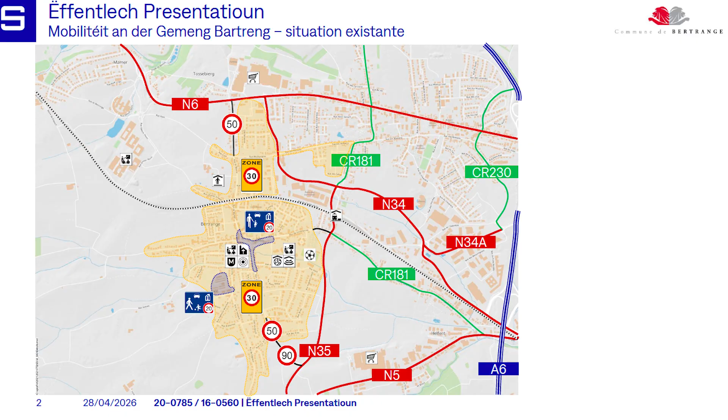But we will go forward. We had a rainwater canalization that we did not have included, and which is also not part of traffic problems. But if we have a center like this, we want to think about how we can improve the quality for the pedestrians and the cyclists, to have cleaner and more secure streets. This is why we started to go more into the peripherals of this municipality.

So last year we imposed the 30 zone in Bartringstrasse. People have to be ready, infrastructure has to be ready, and the infrastructure has to be adapted a bit for this. And this is where we had a little discussion with the people from Mamer, and the people were told about the results from the workshops. And this is a bit of the entire history.

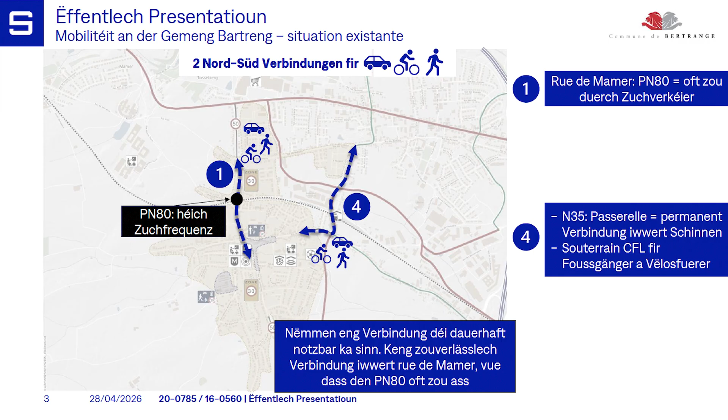So now we have two places where we can cross the railway, at the PN80 and N35. This is where we have the gates, and these are very often closed. We know that. And we have problems with security because people don't wait and don't follow the rules. And because all of this takes a long time, this is not good.

Then the next one is a bit higher up. This is the bridge that goes above the train station, where the bicycle and pedestrian walkway is bigger. And then we have also the small walkway at the train station.

At the extremities we have two connections. What is missing is in the middle, and this is where, when I want to go from the north to the south, from the residential zone to the schools, it's also way more interesting than the Rue de Mamer, where there's no crosswalk.

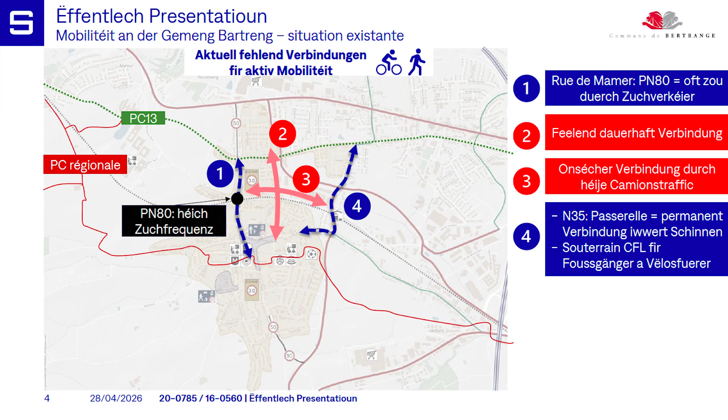And the left-right connection, that is the Rue Chemin de Fer. This is where the trucks and vans drive through, and this is still an important connection. This is the way we use to get out of the center towards the city, so the west-east connection will also be important.

And then we have the entire thing that will be a bit more flowing. We have in the middle, number 2. And then also from left to right, number 3, from Rue de Mamer.

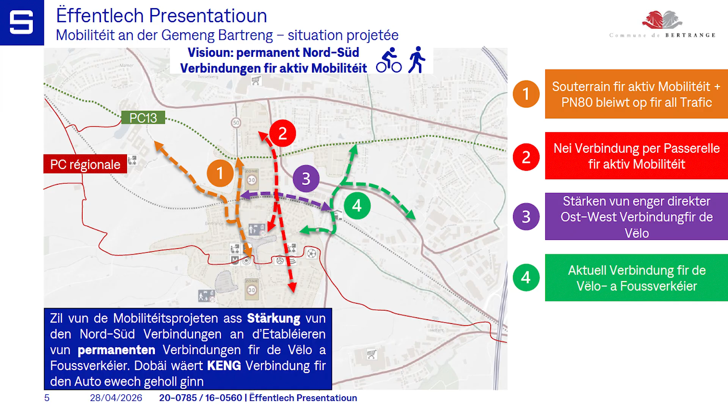And we want to create a secure crossing without gates or unsafe crosswalks. If you look a bit closer in the zoom, we can see in detail the distance between the different connections.

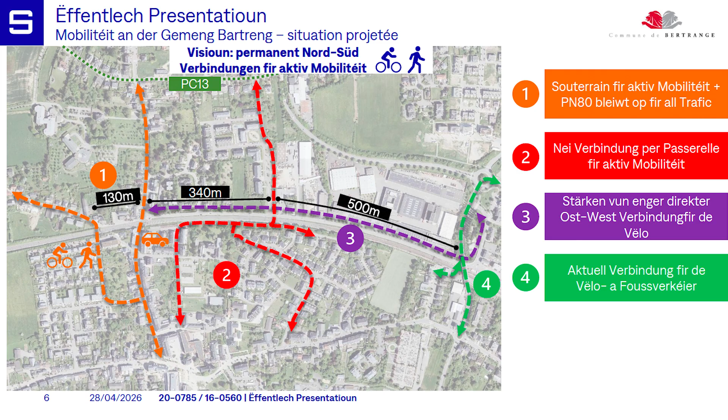Tomorrow that would be the gate crossing, and there will be an underground crossing. The idea is, if the gate is closed, that I have an alternative way to cross, right in front of them. This is why they're so close next to each other.

We should be 340 meters away from the train station. And if I live in between those crossings, it will be quite complicated, and this is why we take the car. This is why we build this connection in between, to avoid taking the cars.

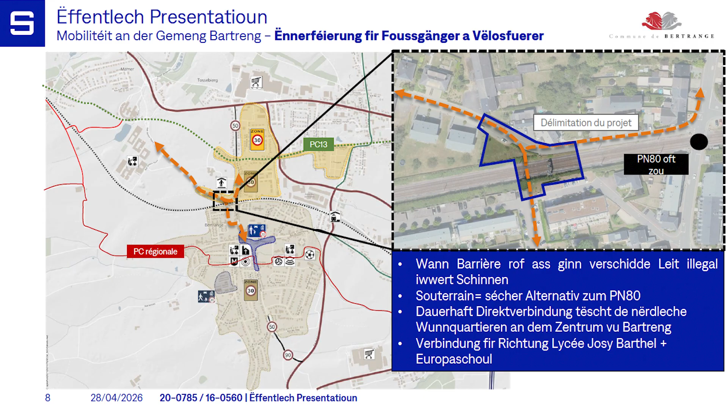The blue is the field, the area of the project. The goal is to offer a safer alternative to the PN80, where kids can go safely to school, and if the PN80 is closed, we can just walk through there and bring our bikes with us as well.

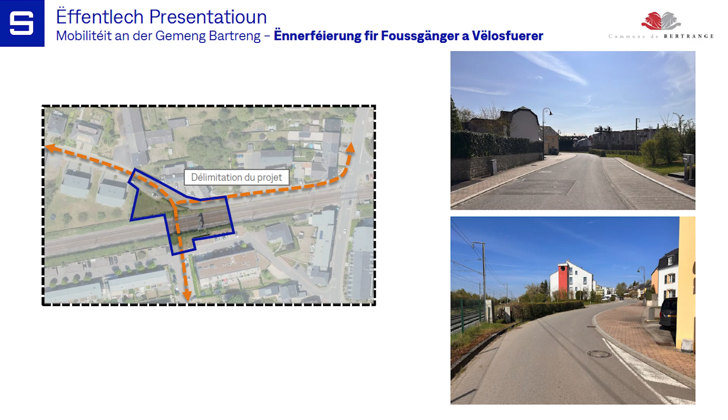I went a bit too fast. Touch the button too often.

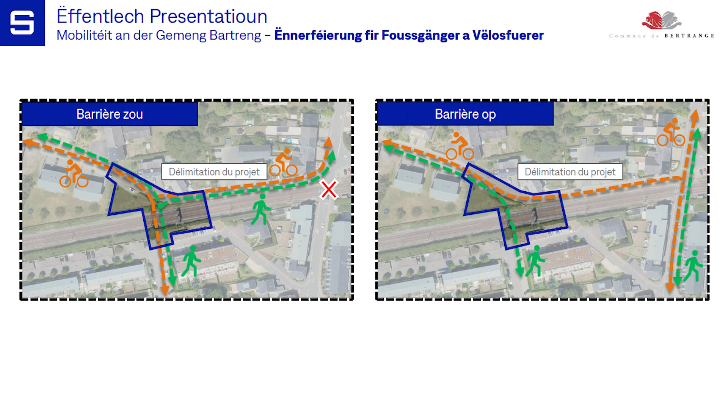So the barrier in the direction on the right, if it's open, then of course one wants to stay at the Rue de Mamer and just take the normal passage. If we go from the European school, from the high school, I can just go to the underpass as well. The bike will probably take the PN80 when he sees that it's open, because we take an underpass primarily for the pedestrian, but the bike, and along the stairs, can be taken with him too.

If the barrier is closed, I can then go to Mamer Street. I can decide, do I want to wait there, depending on which direction the train is coming in. I don't know it actually, except if you know the schedule. Then I can go to Rue Charles Schwall by the underpass and then to Cité am Wenkel, or immediately in the direction of Mamer Stroß, to the center. That is actually the alternative I have.

So to detail, we go into the plan. I have some issues here with my remote. You don't recognize a lot. That's not the idea, I think the plans are hanging outside.

Have a look. But basically, with an ouvrage, meaning a frame that is built, we go under the train tracks, and to the north and to the south we build stairs and a lift. That's the whole story around it.

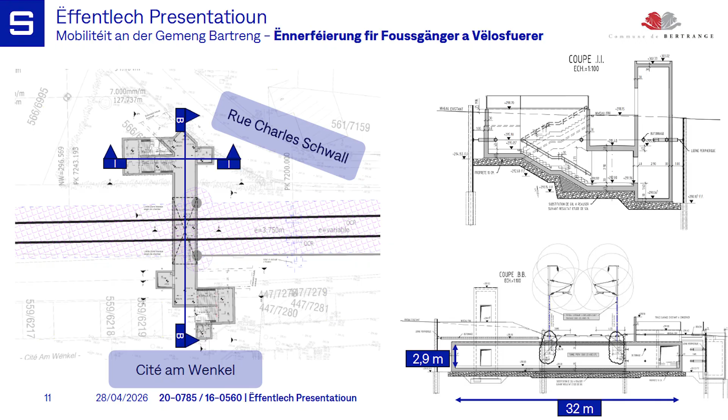And it's compatible that along the years, ramps could be added for bikes. We build it such that we would have a plan B to upgrade it. But today, we need some authorization from the CFL, where the signals are, that would hinder something.

The things we would have to do would be costly, and as we said, the PN8 is already close to it. The bike can already get down with the stairs, and the lift already offers that possibility. We shouldn't make the project more complicated than it already is, so we decided to limit it to stairs and a lift.

The structure itself, underneath the train tracks, has 32 meters of length, and inside it's 2.90 meters in height. As a pedestrian you still have some space, and the width is 3.50 meters. It's nothing very small, because we want people to feel comfortable. It's also well lit, so people shouldn't be scared to go through. Of course it's always an underpass, but it's so close to houses that with so many people going through, you feel surveyed and not alone, since it's not out in the fields.

How does the construction site work? In Rue Charles Schwall, the red area is still a work site, and the blue is a hole. This is what we have to build in order to realize our staircase.

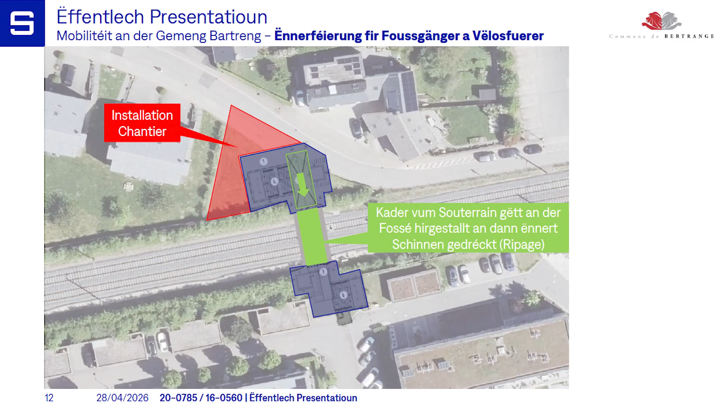To the north, the green is the frame built in a hole. First the hole is excavated, then inside the frame is built, and then over one weekend, while the tracks are removed, we push it through. I'll show you a picture so you can recognize it. That's why we need this space to build the frame.

The underpass is the passage you go through afterwards. We are in the middle of the city, meaning first we have to do some reinstallations. We have a sidewalk close to it; in the final project the street will be changed.

The street will regain some space in the final design, but during construction we'll have less room to drive through. As you can see here with one lane, it becomes a dead end. Back there are maybe a dozen houses left. In our opinion it's manageable: if you see someone coming around the corner or from the front, and if nobody's coming you can just pass. We may install a priority sign, but with the few cars using this dead end, it should work out.

We need the space, as I said, to carry out the construction. Afterwards, the hole is filled up and it's as before.

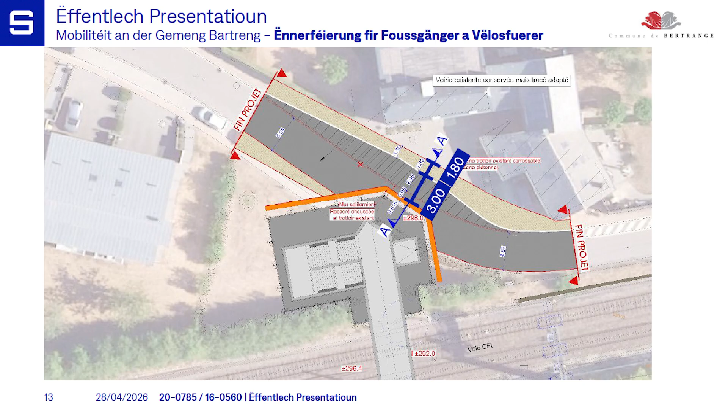This is what it resembles in its final state. As you can see, the staircase goes around the corner at 90 degrees. It's not very far, but I especially want to show this detail.

If you go down with a bike, you may already know this from other projects: you can just take it along with you. If it's an electric bike, it's a bit more to push. Or, as I said, you just take the lift or the stroller ramp. If it's a cargo bike, you won't be able to take the lift, because there's no lift large enough for a cargo bike.

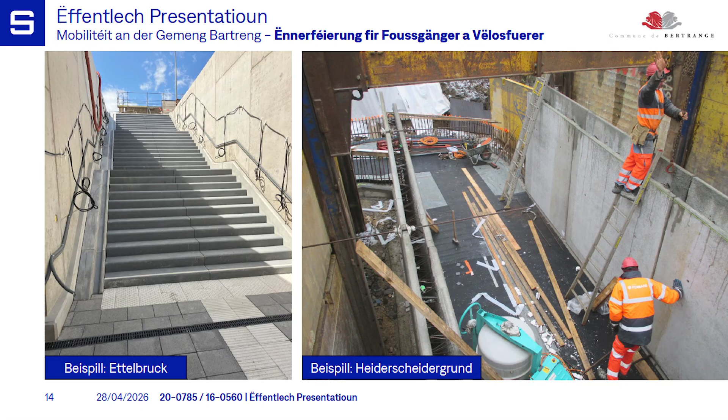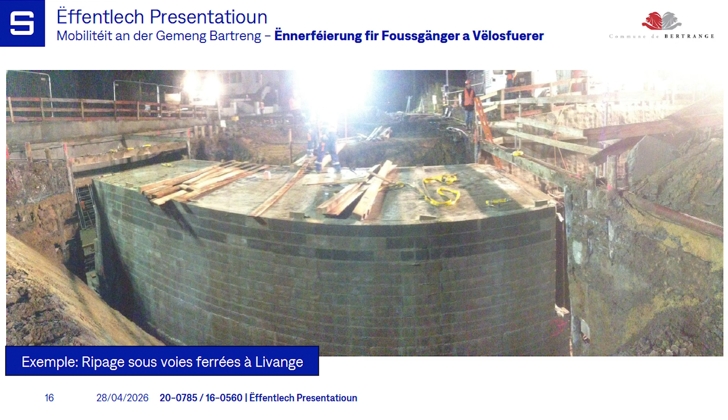This is an example of a frame built along the tracks. You have to imagine the tracks were there before the weekend—in this case before it was built here in Livange.

Then comes that famous prolonged weekend between Friday and Monday—I think it's Allerheiligen. We'll see the planning afterward: the tracks are removed from Friday to Saturday, and then Saturday evening this frame is pushed inside.

Let's get back—the frame is already pushed back in, then we fill it up with dirt and the tracks, and from Tuesday on the train can drive again. Monday is actually a holiday, so we can't do magic, but it's already great that we can build it in such a short time frame.

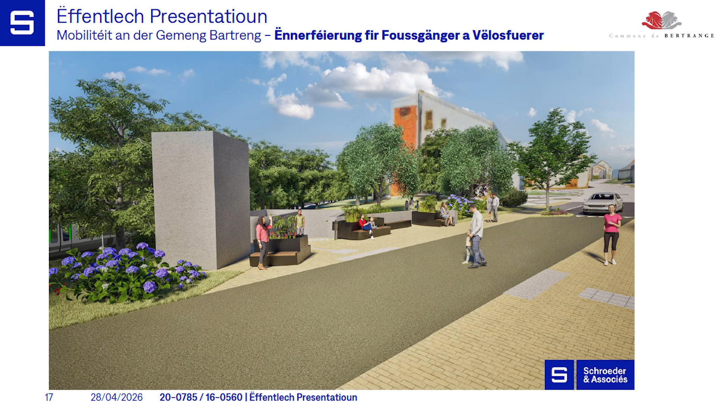Here we see images of what the final situation resembles, so you can imagine it better. This is from Rue Charles Schwall looking up toward Rue de Mamer, and then the stairs go down. This is the lift from behind, and this is the street itself.

And then let's speak about the planning. When do we go to construction on your streets? For those who live there, it should start February 27, and we've planned to finish in June 28. It doesn't take years, but it's still something.

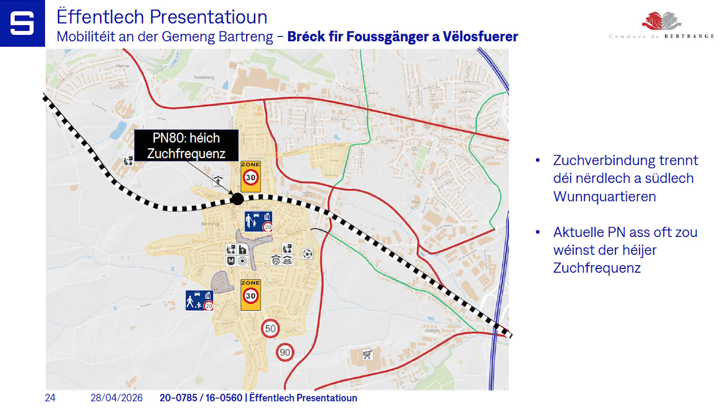So as said, afterwards we have a discussion about all the projects. The second project, the mobility project, is this footbridge in the middle, Allée Mayrisch down Rue du Chemin de Fer to Cité Eechels. Here once again the history: the train divides - what do we do?

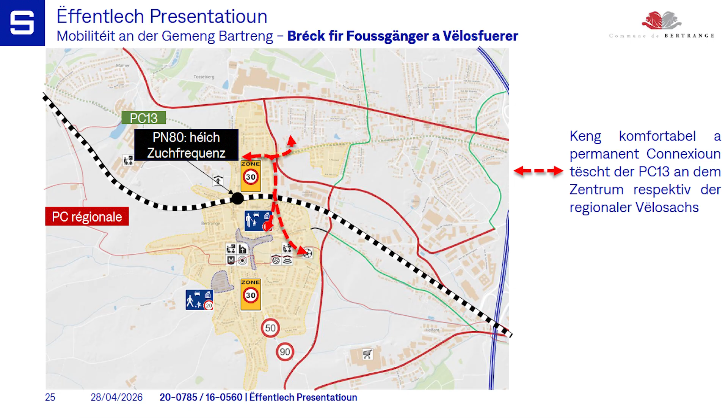The red connection is above the tracks. Why? Just by topography it fits, because the city at the north is a bit more elevated. If you go down to Rue Chemin de Fer, then you continuously drive downwards. So at a certain point we start going up from the tracks, and on the other side we get down behind the hill, not on the hill but the side towards the train tracks. That's why just by topography it fits.

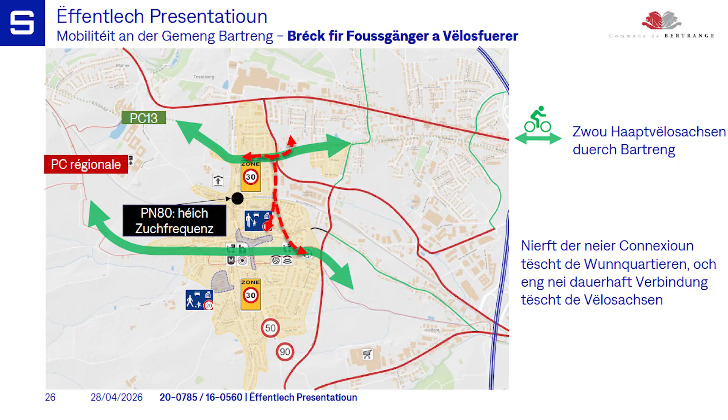And then we have additionally the chance that through this we can create two bike connections. Once the original connection that comes south of the tracks, and then PC 13 Rue des Romains, where this also works. And through this I can already say it - through the ministry, we elaborated with the ministry.

Once you get connected to a national connection, you get subsidies accorded, and we're in the final phases. We still wait for the final post, and we assume that after some conversation, the municipality will be paid by the state, because we do it in the interest of the bike and better infrastructure in general.

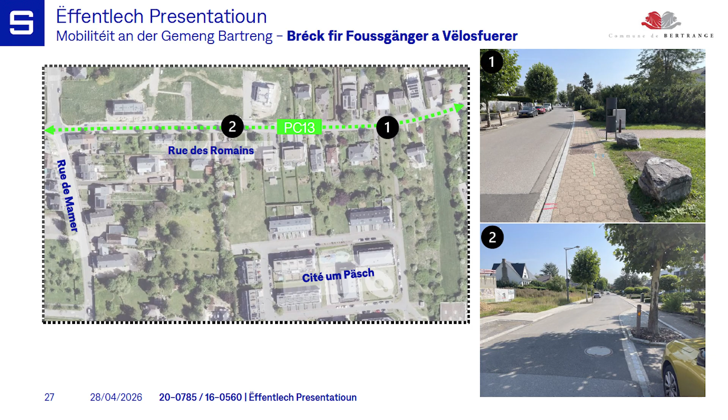Beyond the municipality, this project belongs more - I've only spoken about PC 13, Rue des Romains. We want to profit from the fact that in Rue des Romains it's already narrow, but there's a lot of traffic going through, so the bike will get accorded more rights. We will reduce the tempo - it's already 30, we won't reduce the tempo further, but want to establish some additional measures. We did some measures, for instance, that cars drive a bit slower. Some people are annoyed, but others that were annoyed by too fast driving cars will have a relief.

There you see the connection - I got to search it for myself. It's this down into Cité um Päsch, and this is a way. If you don't know that it exists, you already cross it without noticing. You already got to be from here to know that this exists.

This point will be reevaluated, will be connected. If I drive here with the bike, I'm immediately in the street. It's a narrow sidewalk, and we want to improve it.

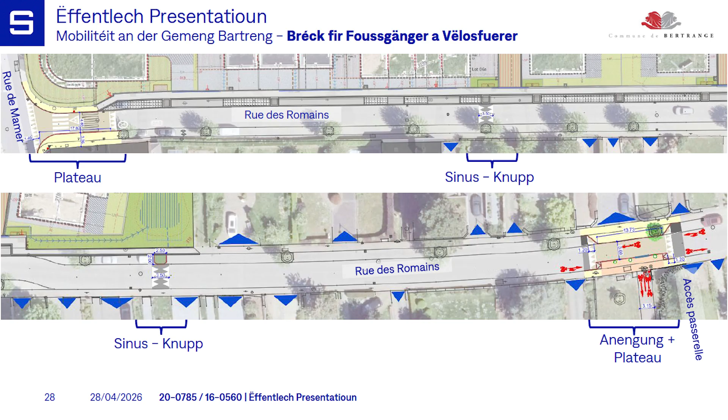Here's Rue des Romains. From Rue de Mamer, it's divided in two, so as to be big enough to the right. And then here, I'm in the connection down to the city, where we make the street narrower to one lane, but the bike will get the possibility to drive across the sidewalk, making the way more secure. We won't end up anymore at the narrow sidewalk, but on a wide surface, and then I can take the turn.

This is a foot bridge that we want to show you soon. We want to connect the different streets cleanly to the network.

You can maybe notice some speed bumps, those we already installed on Rue de Mamer, where you drive above and it shakes the car, so automatically you drive slower. Then on Mamer Street itself, there's a plateau near the crosswalk, over the project for the whole intersection.

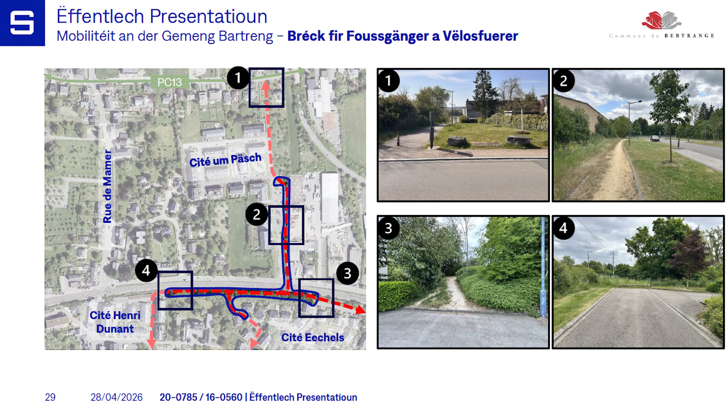So there you go, then PC 13, we spoke about it. We go down Cité um Päsch, Rue Aline Mayrisch, Saint-Hubert, and then to the footbridge at point 2. Then we go over to the southern area across Rue de Chemin de Fer, then a 90 degree turn left on Cité Henri Dunant, and here Cité Eechels we can connect at 2 points.

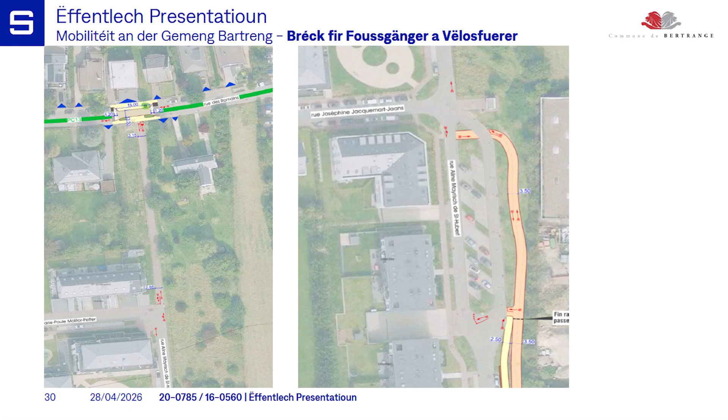What do we do in the upper part before we speak about the passerelle? This is the narrowing here for PC 13 on Rue des Romains. As I said, to better connect to this path, trees that were recently replaced were put back further away. We'll explain why.

It's not because of the car, but because of construction. Then we drive down to Saint-Hubert. We don't have space on the side, paved up, it's private parcels. From the junction standing there before the street splits, we drive across to what is now still a sidewalk, and then from this part on, we drive to the footbridge, and the sidewalk just continues from the footbridge. We can connect to PC 13 cleanly, so that the network to the north is better.

Then we continue to the passerelle. Michel may come now, Michel Bichler, the engineer for us for the footbridge. The person from the underground was excused for today. Thank you for the word.

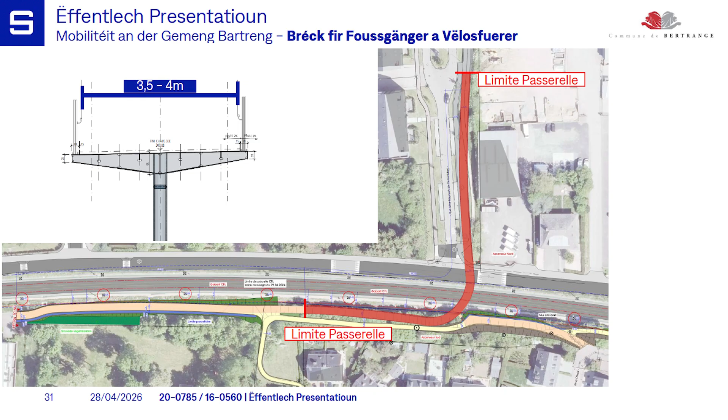I'm here for the footbridge. I'm the engineer for Schröder Associé. I have the chance to be part of this project since the beginning.

So here we have a bird's eye view of this bridge. It's a bicycle bridge with a pedestrian path, so we will have to make enough space so that both may pass each other. We also want to include people with reduced mobility, so they may also have a secure crossover. Both are very close to the road, and we also wanted to put it very close to the railway so you don't have to go far away. We also had to make a lot of space for the bicycles.

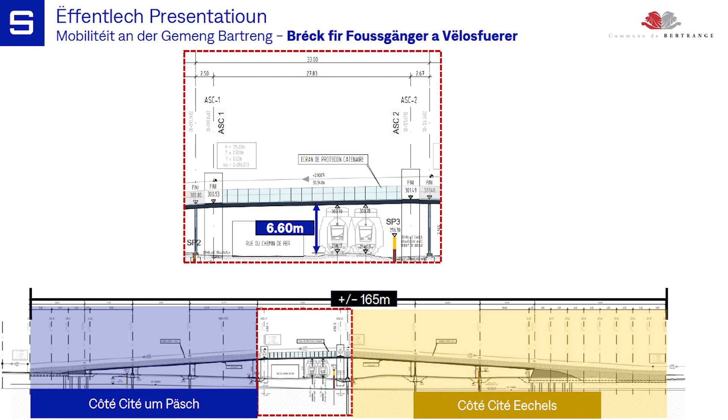This is another image where I can explain it a bit better, on the horizontal view, where you can see the height of 6.60 meters, and also between the two elevators we'll have an incline of 2% for reduced mobility people, and this will give us a bridge of 165 meters.

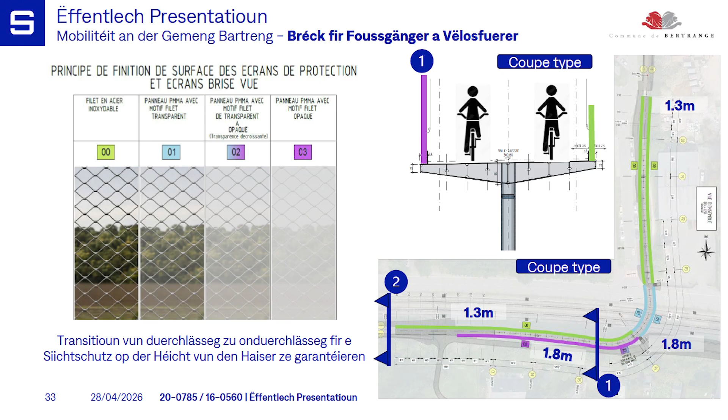Visually, this bridge will be dominated by a more narrow part. You can see on the picture that what we proposed is that most of it will be done in stainless steel, inox.

And here we'll need a protection with a change of system, and we'll go actually between the elevators, which are transparent here, but we will try to adapt them to this glass, plexiglass.

And then we also have the third case where we will go past the few gardens of these houses. And we also want to improve the site.

And we want to have this translucent panel, and then a small transition from translucent to opaque. Then we'll have an opaque screen so that the person on the bridge might have the feeling of being narrowed down, but also allow the person to have the possibility to orientate themselves and look around. This is also to adapt to the situation for the people.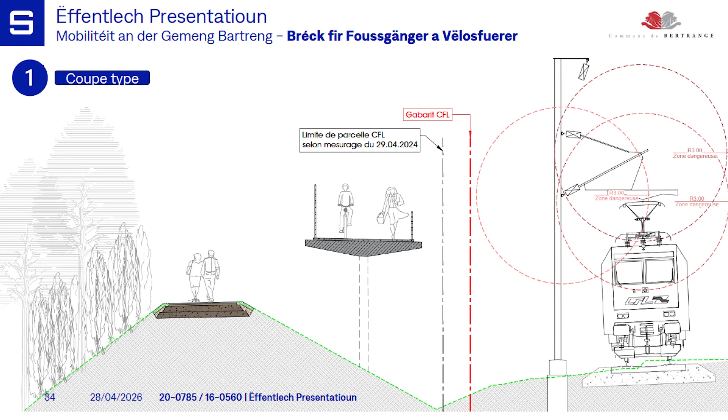And then we also create an opaque rail so that people won't look over it. And then towards the train rails we need to have a 3 meter distance between the poles of the train rails, which has also shown us this indication.

I was a bit too fast.

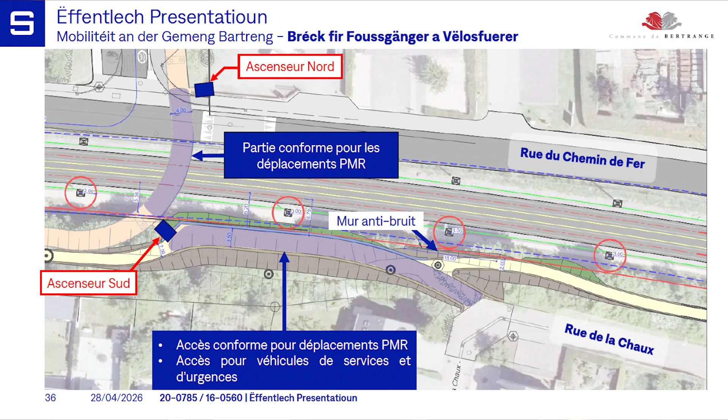This path, which was 2 meters, will transition to a pathway which is 3 meters, and which then follows down to the street.

From this situation, we want, with this way, to generate direct access to the elevator. So if something happens on the bridge, ambulance or firefighters would have direct access to this elevator.

And also for the maintenance of the elevator, so that they can also repair the elevators. To make this possible,

we have cut down a bit here, and what will be replaced is that we'll put a wall, anti-sound, anti-noise, and this is also what we have done a bit of studying about, to see what this wall would have to be able to block.

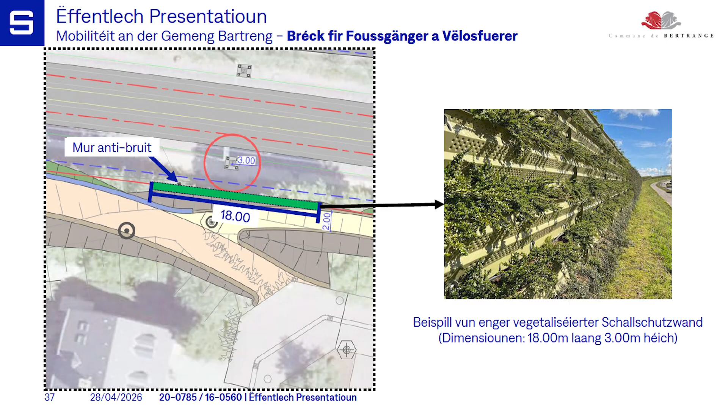Here again, we have the anti-noise wall, and we want to have a green wall, green protection, which will then also be a metal construction put in the ground, and this will put a lot of weight on the ground.

So we also have a more effective solution. If you see on the highway, they are less strong than what we recommend here.

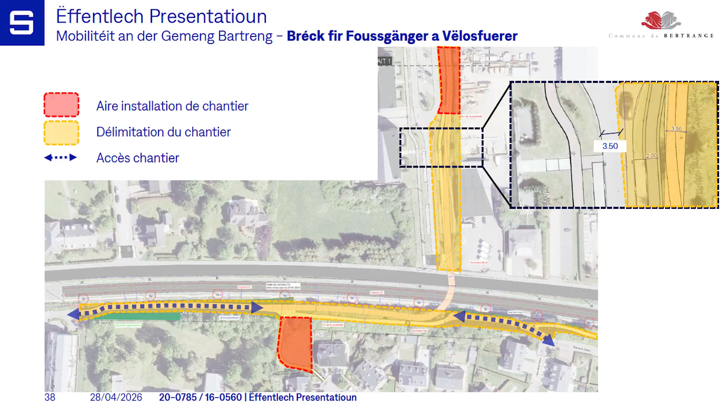And to be able to build, we also have to put a certain surface area to availability for the constructions. So we have here the zone of installation where they will be able to put their materials, here on the bottom, where there's currently, I think, a playground or football field.

And the access for here on the top is a bit less problematic, because we have access. But here for the ramp, it will be a bit more difficult.

And we want here to facilitate the access so that the constructors will have quicker access, and so that they can enter with their vehicles and work. The second option is that they will enter down there. The best option is to have an entrance and an exit for the construction site, which will facilitate the organization for the construction.

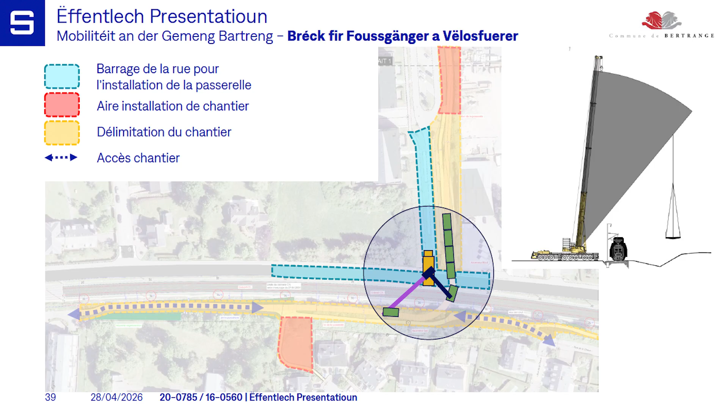So we actually have a few foundation works we have to do, and this is where the metal working will be placed, because we'll have to place them before welding them together.

And this is where we get the advantages of the steel, because we'll have to be able to transport these in big parts. And you have to imagine that there will be a huge crane which will then pick up the different parts and place them together. This is where we talk together with CFL to organize where we lift these parts.

So first step is we set them, and then we weld them together. When these metal parts are picked up, there will be big cranes that will pick them up. I think in September on the A3 there was a similar footbridge that was picked up.

This is also why we have here the installation zone for the construction site. So we'll close this road halfway, and we will need, for picking up the big elements, the entire surface of the road, so that he can maneuver his parts. And this is also when we will close the railway.

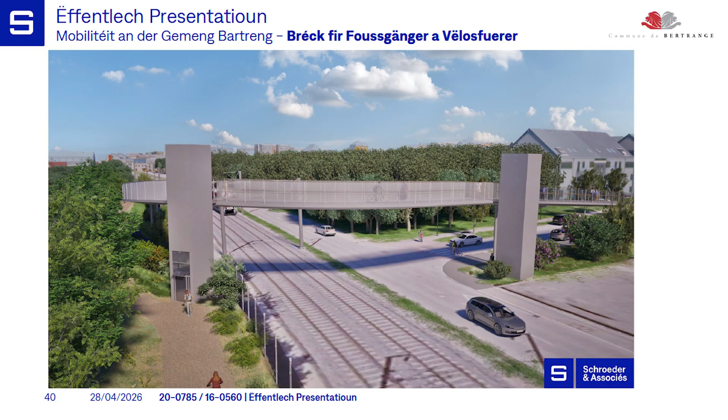And then we can also see the protection screens, and where also the transparency will play. Here you can see where it will be more opaque on the left side.

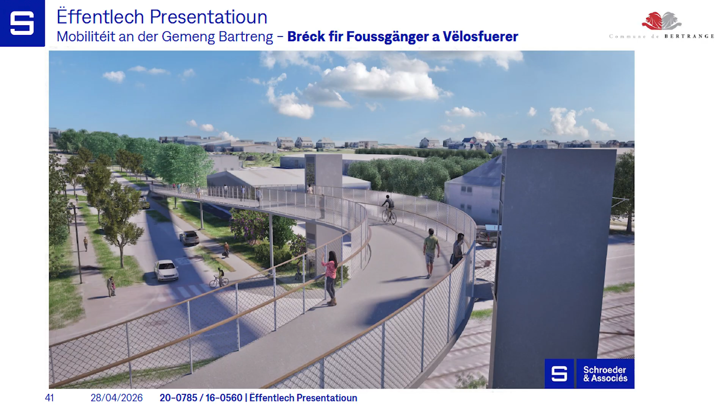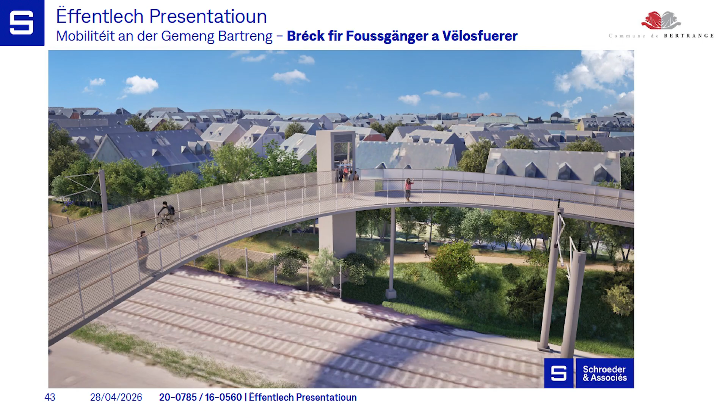Here you have the view from the top of the bridge. One's from the Rue Aline Mayrisch, Saint-Hubert. One's from above the CFL. And another view from the top.

One's from the walkway, which will be the emergency exit from the elevator, which will have the width of 3.50 meters.

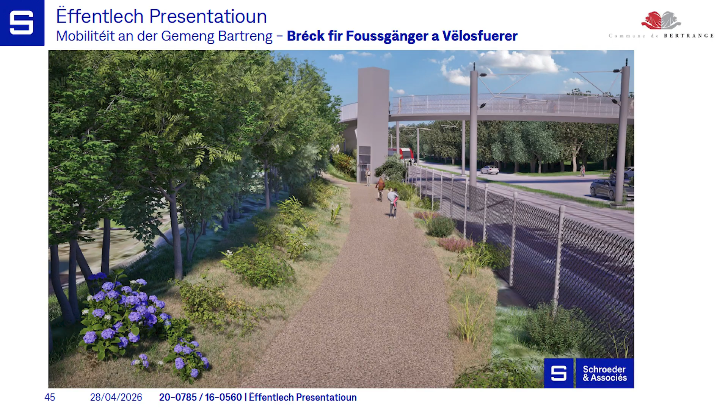This is the planning. So we wanted to start at the beginning of September. So actually, until there, we have time to prepare ourselves, so that in September we will pick up the metal parts, and then later on we'll put on the rails and the safety screens.

The bridge will be put up with temporary side protections so that the workers will be protected, so that during phase 2 we'll put the real rails on the side. This is where we'll have to close to take away the temporary protection. And then phase 3 is where we'll do the rounds.

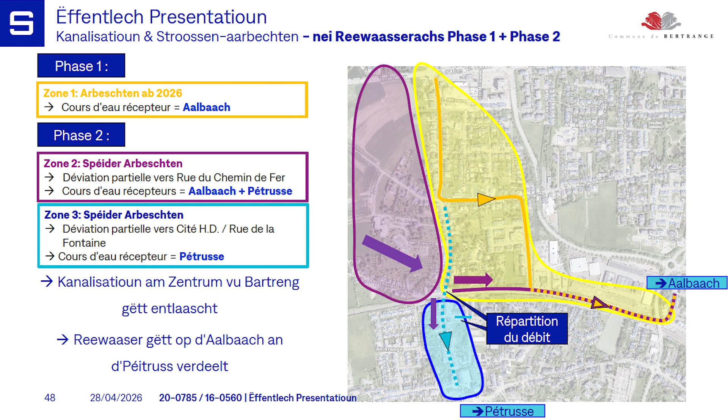I can speak about something where you normally can't speak about, the channel that is normally disappearing in the street. Some history around it, why we do this rainwater axis. The project started with the idea of setting up a rainwater axis initially. So initially we thought about making a rainwater axis that starts back up here and goes straight to the center.

Why do we build such a rainwater axis? First, for external areas and surfaces outside of buildings that have no building permit to connect to rainwater, the clean water there shouldn't go directly to the cleaning plant, but should be stored. Also, because more is being built, new building permits require that dirty water is separated from rainwater, so these new districts can be targetedly rediverted to a rainwater axis, so it won't get into the mixed water canal.

With the more and more intensive rainfalls, it was clear that the center of Bertrange has problems and is more and more a victim. Our office was asked what could be planned in order to targetedly relieve the center.

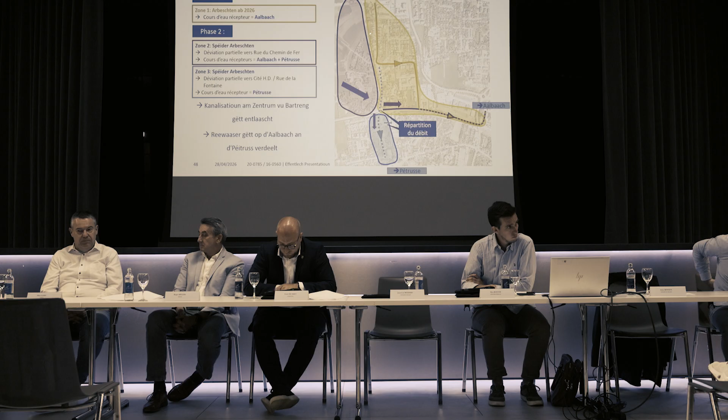Here in the second phase, we build something that allows us to manage a debit, meaning the water that is collected is divided. There's a debit we fix, which can go towards Rue Chemin de Fer.

It is planned that the canalization still there has enough capacity. But if more water comes than we can redirect, it will be diverted to Rue de la Fontaine here in Zone 3. Also here we divide it again, with the goal that the water is diverted from two points, so as to better redistribute it.

The objective of this concept is that we relieve the canalization and that the rainwater can be divided.

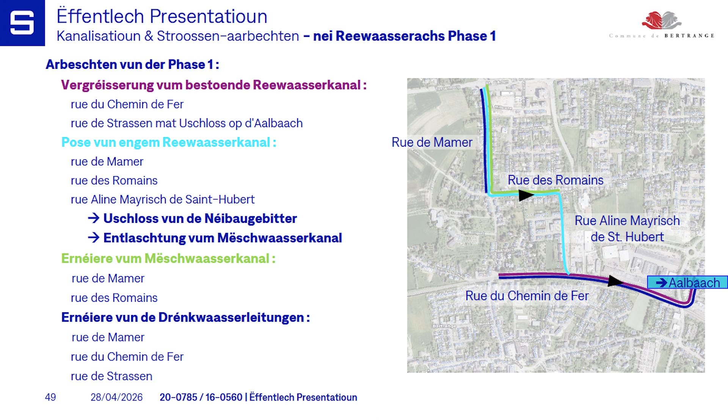To speak more concretely about the tasks in the first phase: Rue du Chemin de Fer, up to Rue de Strassen. As said, we expand the already current rainwater system.

This channel's capacity is still okay. Still, we looked at the state of the canalization, and it came to our attention that only in Rue de Mamer there are problems, that it's not completely sealed.

Maybe roots already found their way in. There may be some holes. So we only redevelop what is very necessary.

On the other hand, we looked at what belongs, what about rainwater canalization specifically. We looked at where to reinforce the network. It's only in Rue de Mamer, Rue du Chemin de Fer and Rue de Strassen.

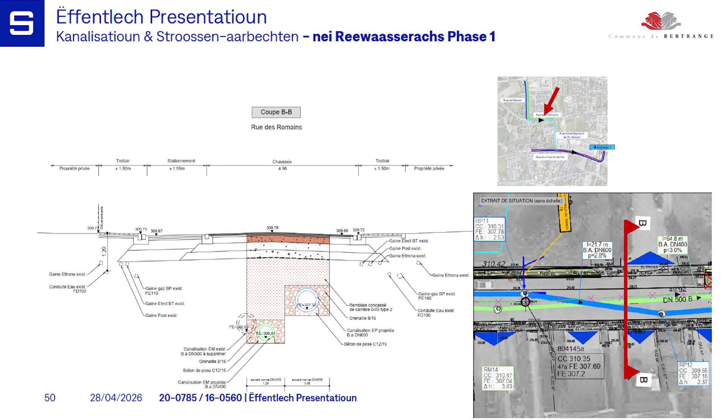This is the case. To depict this, we are here in Rue des Romains, meaning we have here the case that the two axes are developed, rainwater and mixed water canals, to show what about the passage, why partly we have to close the streets, because we work in the middle of the street.

Now you could say, yeah, you could put it a bit over. No, because here in Rue des Romains, at the site we have many trees, and we looked at maintaining the trees. And now we have to respect some distance to already existing networks, meaning gas channels, electricity channels.

We also have the problem that once we have to cross the channel, leading to intersection points, from one channel we have to go to another or underneath, which makes the whole task more complex. So we will therefore just completely cut off the streets in order to work faster.

In Rue des Romains, in the street area, we won't touch a lot, only local measures. But at the end, we do a couche de roulement, developing the final layer of the street.

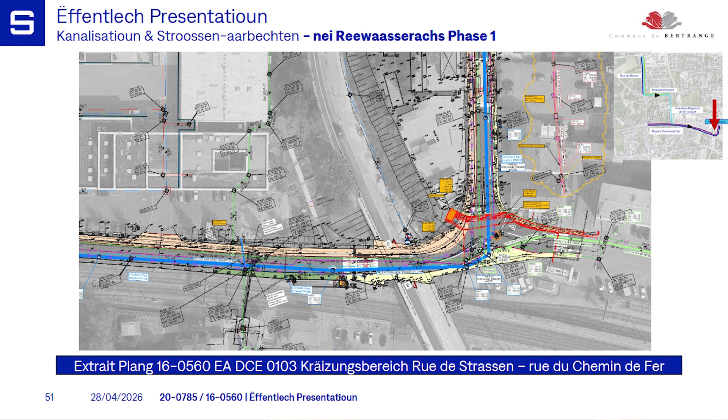Here's an extract of the plan you can also see outside. We are in the intersection area, Rue de Strassen and Rue du Chemin de Fer, to show what is being planned. We not only have the rainwater canal here, the channel, but we are also deleting the old rainwater channel that is taken out of order.

We have a rainwater channel that is put in place here. In Rue de l'Industrie, we also have a part of drainage, mixed water, which also creates a profile to implement a new target placed here, and additionally we have the redeveloping.

To show you what we have in the soil, in the ground. There you go.

Yeah, you have a side card showing what the channel looks like from Chemin de Fer already. Excuse me.

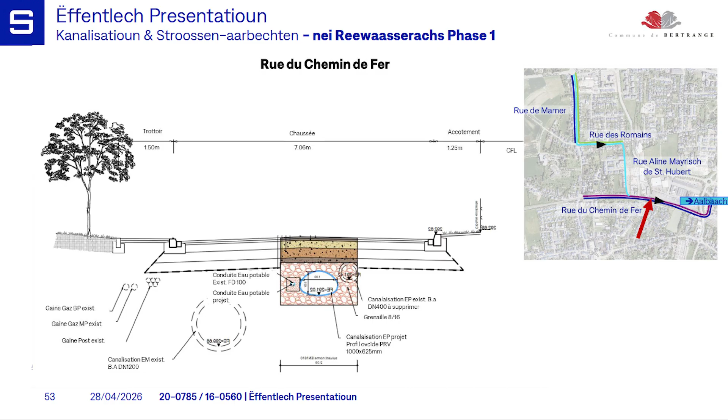So let's get back. We have the already existing mixed water channel that we don't touch, and here the existing rainwater channel. That's not very low for two reasons: we got to connect to the current, we can't go lower, but we have to pay attention to the channels that are here, 1.20 meters still cross it.

We decided not to take a round profile but an oval, because it's wider and less elevated, and through that we gain some centimeters when we cross the other networks. We also decided to use a different material, meaning not classical concrete but PRV, glass-fibre reinforced plastic. Because its wind strength is stronger, we gain some centimeters once again, and it's faster to put in place.

I come back to these slides to show what we have under the ground, what we do. If the slide jumps back, I'll show you what we do on the street.

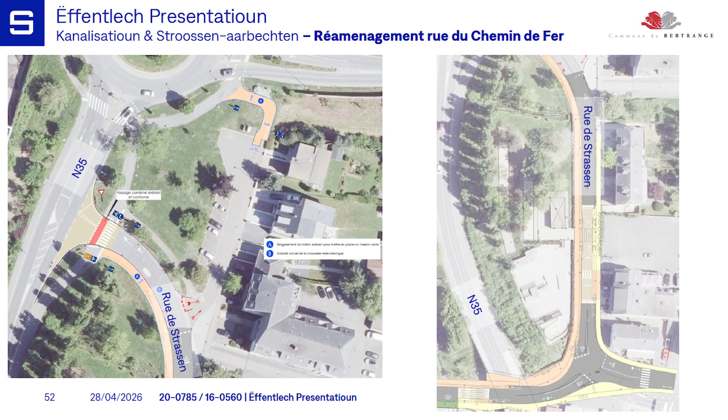We are in the Rue de Strassen, in the transition area from National to Rue de Strassen. What we do here is visually adapt it to show that you go to a secondary route. There's also an adaptation so the bike crosses here, goes to the side part, will be directed to a sidewalk, a mixed usage sidewalk. So we can drive down here to chemin de fer. Also a punctual adaptation: the already existing way will get wider.

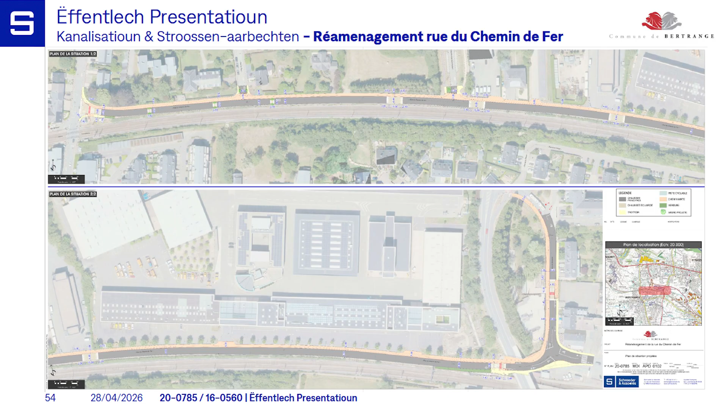The concept extends to the intersection area with Rue de Mamer. Here we will continue so bikes can use the mixed usage sidewalk. We also have planned some hills to appease the traffic. We have planned a lot of work on the street, because we make the street narrower and the sidewalk wider.

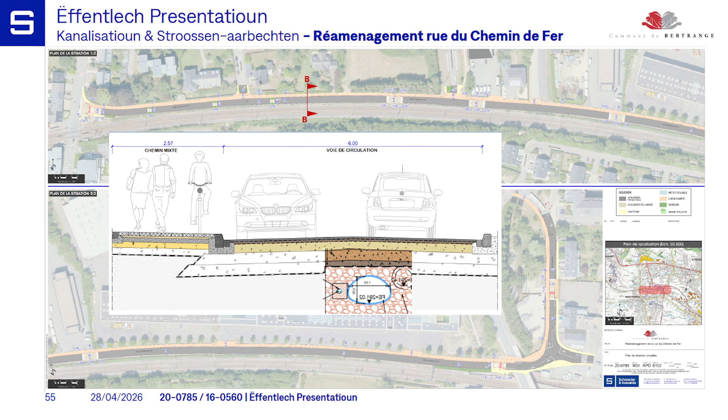There you go. Thank you, Anne.

You see, these are complex stories, that's why I let her explain, because I don't get everything. I prefer the simpler plans. Whereas it won't be so easy now either.

Of course, the surface above it means that we've got to close some streets for a certain time. Closing them means the inhabitants always have the right to access their homes, and firefighters are able to access too. This is absolutely guaranteed. However, the street is officially closed off, and it can happen that for some houses you can't access your garage. If there's more complex and deeper work you will get informed, but this is the standard for every construction site. Every week there are construction site meetings.

You can stand up. This is the man who, for some years, will basically sit here. Exactly, the poor guy. So the work site is accompanied by an entrepreneur working there.

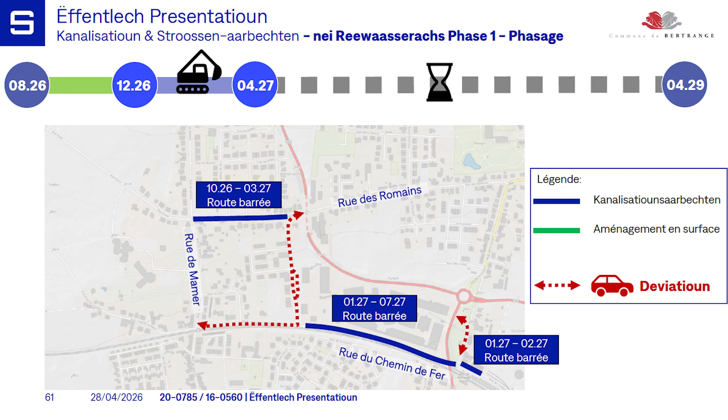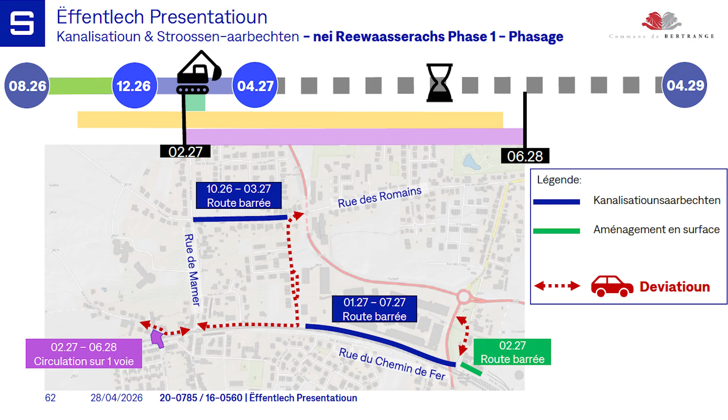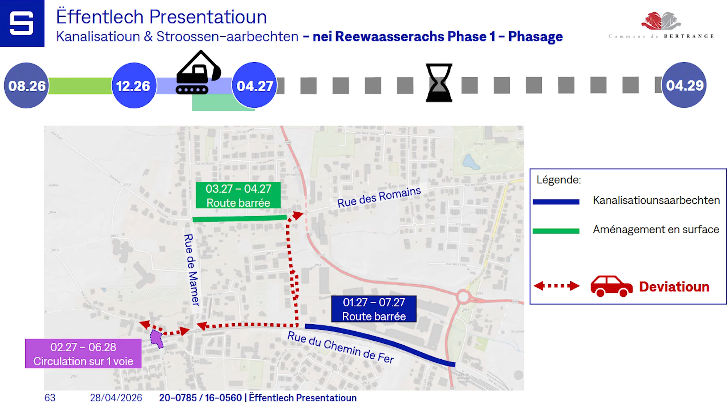And then, in the next phase, we make the surface of the Rue des Romains, and in the next phase the street is reopening, if my button works. Then in the next phase, where Rue des Romains has reopened, as being said, Rue du Chemin de Fer, at the beginning at least, will be closed off.

This time, mid-27, or after Easter, it's about Rue de Mamer. This work site takes about channel work, other networks, will go until end of next year - from April to winter we'll work there in depth. Then in summer, in the meantime, will be done, and the street will reopen. If we work in Rue de Mamer, we have the advantage.

We only work in the northern part - I may haven't seen it. As you saw with the channel, we only build the first phase of Anne's channel. The second phase is 2030 plus, somewhere later - there's no urgency. We wanted to not add something up in regards to budget, but also to your comprehension.

We are in a comfortable width of street, so we can always keep it open, except if we do traverses of the street punctually, but actually it's always open. And you've got to have a look if we work in one lane of the street, but it should always be accessible because it's narrow enough, wide enough.

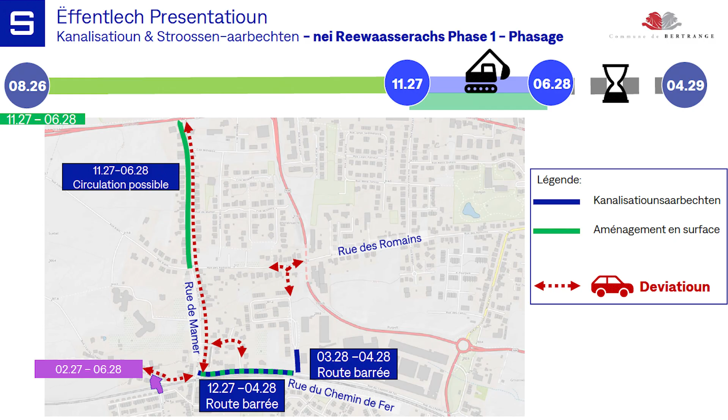Then there's some time frame. The bottom part is completely closed off from the city. It's always so the time - we get to the year 28.

We go to the left part of the Rue du Chemin de Fer, and given the channel, but also the footbridge, we have a certain time it's closed off, and then the city is only accessible via this, and then we are in the final phase of Rue de Mamer. That's why it's green, and as such you can't actually access Rue du Chemin de Fer from this area, but you can completely use Rue des Romains.

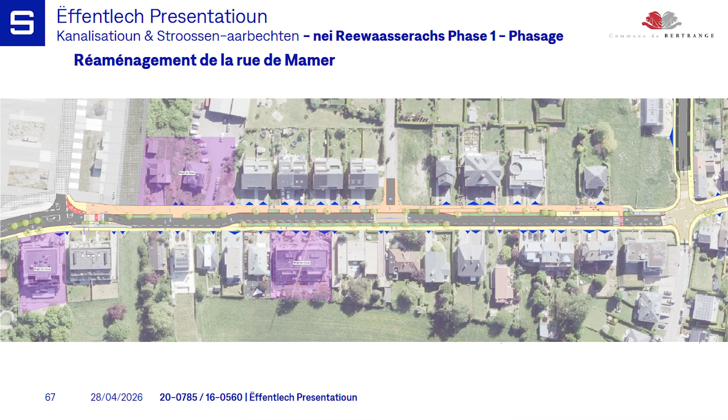And now from Rue de Mamer, this street is almost done. I won't talk too much about this, but you can see it's already a different street than today.

We also added a straight line for the cyclists, so that they don't really have to take the mixed road. You can see here we will add some trees where the cars will be able to park, as well as some water drainage.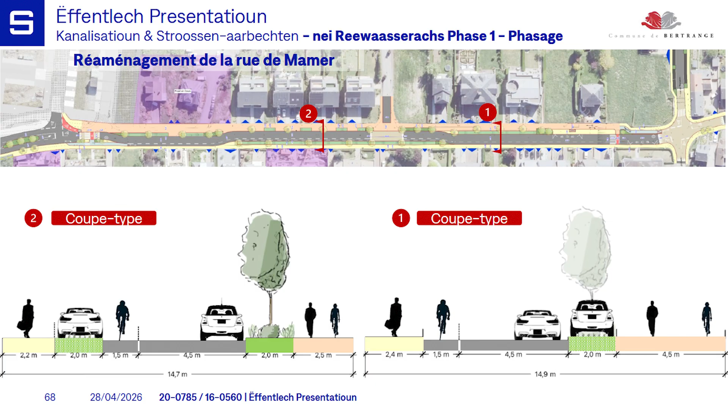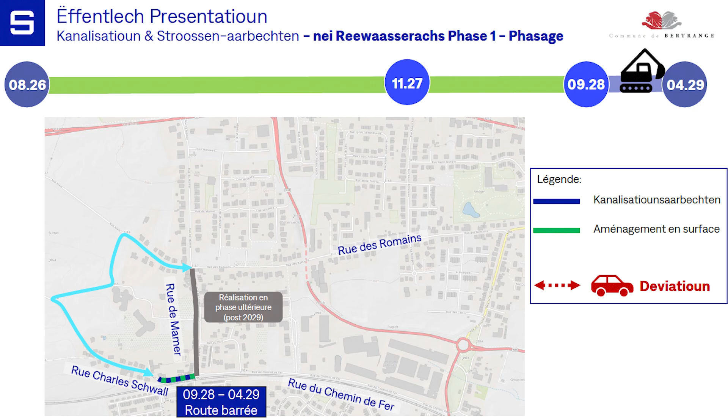The goal is also to reduce water problems. Now we'll be more towards the end, working towards the middle part of Rue de Mamer, because this will be the second phase of the channel works.

We still have constructions here at the bottom on the ground, and at this moment the residents will have to go through the fields to leave. This will only affect the houses from Rue Charles Schwall, and this will be from the 9th of September 2028 to the end.

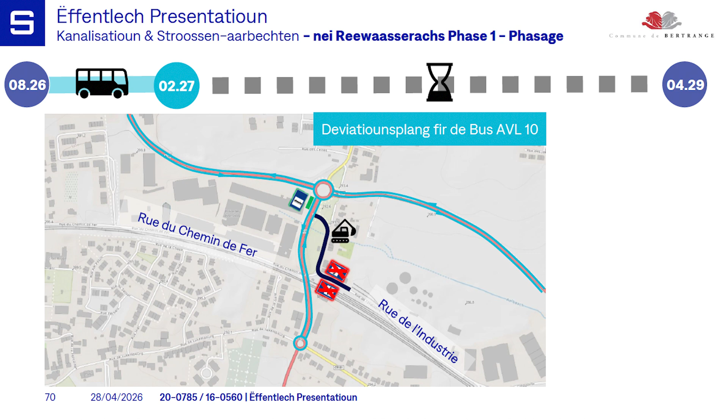We'll displace the bus stop to the roundabout. The pedestrians will have to walk further away from the train to the bus stop, but we couldn't have done anything about this.

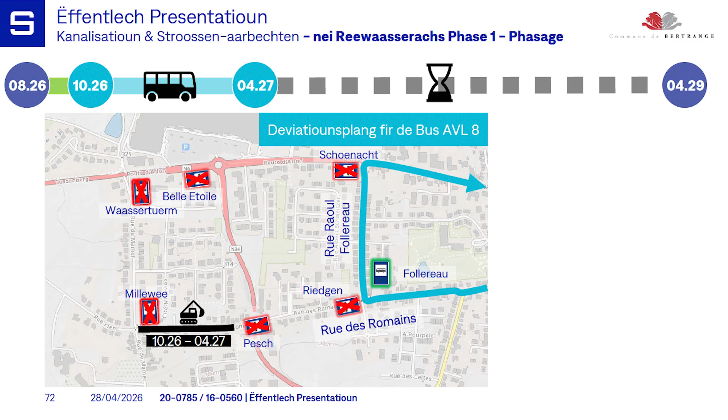Then the bus line 8 from the city will drive the same route, but some stops will fall off. It will still drive the same from Follereau up.

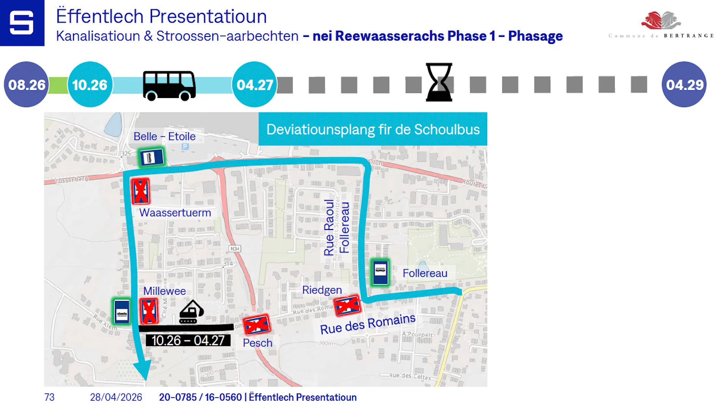We also have the school bus, which will go up at the Follereau, then Belle Étoile, and then back down into Rue de Mamer. There are no other ways, so you don't have to bring your kids now to school, but this is still doable.

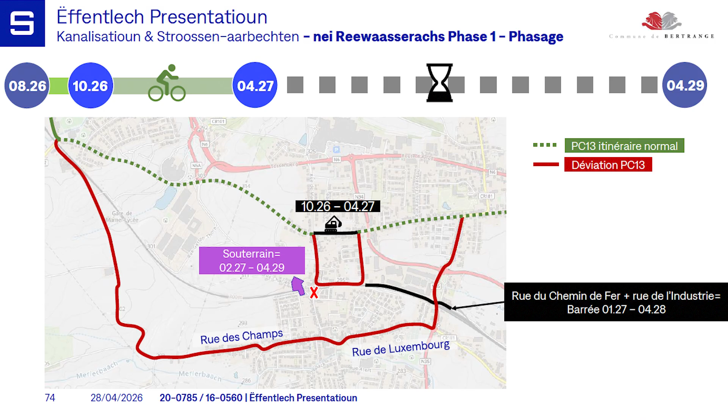And then also to close for the cyclists, we have to have the authorization from the city when we close a national bicycle lane.

So now we thought about an entire deviation that will start at Mamer, but for this we'll have to talk about it with Ponts et Chaussées. We will also need some authorizations, and we didn't really talk about this in detail with Projets. There might be more than just one possibility.

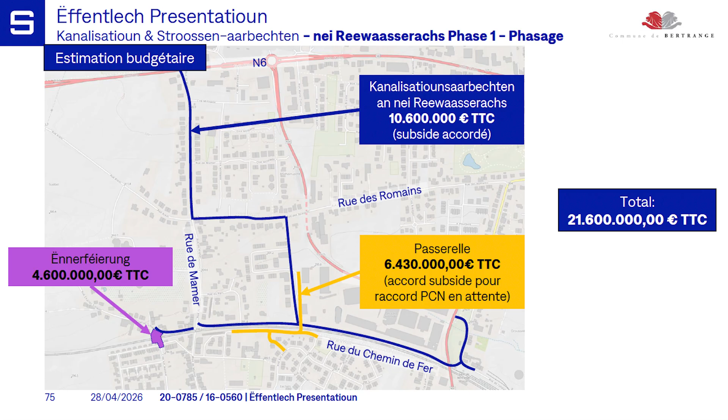The entire operation here costs quite a bit to the municipality. Thank you a lot for helping us with planning this project. This takes a lot of work to optimize it for the residents and the municipality.

This is also why we have reunions and informational projects. So we have a total of 21 million euros, of which 6 million is for the footbridge, and the water channel costs 10.6 million, where we'll have a few subsidies for the rainwater access.

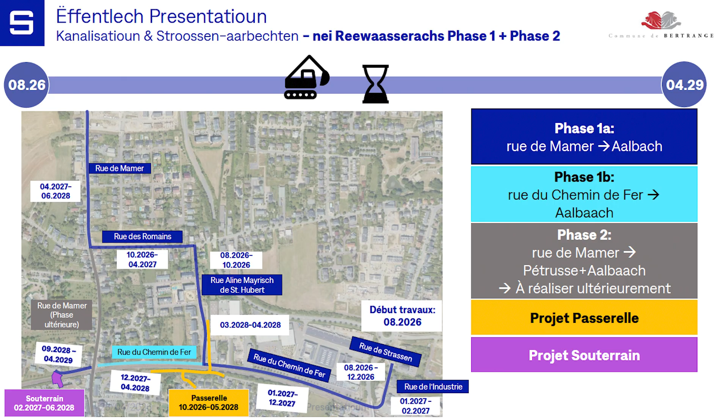I would sit down now and we can discuss.

I would like to take a word. I would like to say thank you very much for this group work. We worked a lot, spent many hours on this.

We were also in the council quite picky, because this also has a reason, since we know our residents. This is also why we questioned ourselves quite a lot, to make sure that all the inhabitants would accept this, and now we are quite excited about your returns.

I know that a few of you have a lot of thoughts about this, and we also want to know if you're happy with all these constructions. We know that the constructions will have some disadvantages and discomforts.

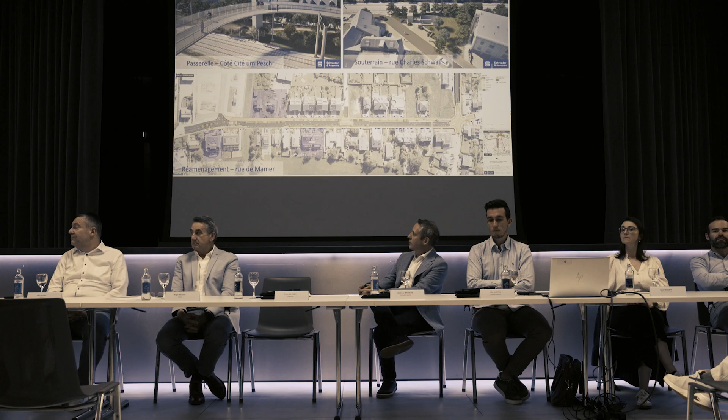You said that there will be a special gap for us to push the bicycles up the stairs. For that you would have to reduce the incline of the stairs a bit more. It's also about the width, because a few of the cyclists have cargo bikes. Would you maybe consider these situations, that with the pushing of the bike up the stairs it will be a bit more comfortable?

I'll continue in Luxembourgish. Thank you to the translators. It's not always easy to translate.

Of course, we are a lot considering the ramps for these projects. We also talked to the ministry and to CFL about the ramps, and they said we should just let it go.

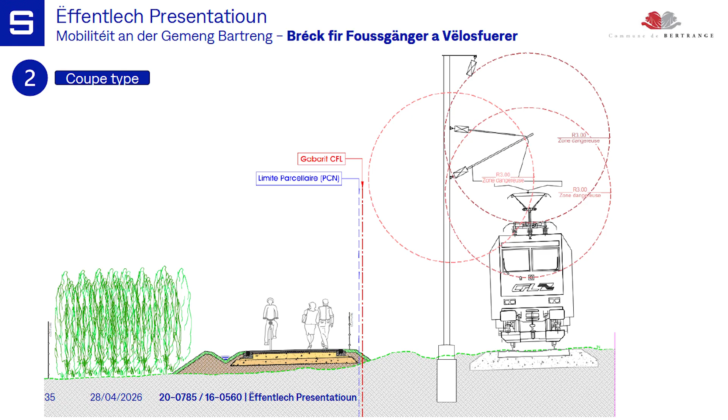I wanted to ask, when we are always on the same place of the footbridge, will the anti-noise wall be placed after this construction or before the construction? How long will the construction last?

I didn't understand acoustically a lot, but it was more about, are we going to open this here and then add the wall? Was that the question?

How many trucks will drive through, we won't know. When we are standing on the footbridge, are we higher than the houses, the roofs of the bridges?

I don't know how high your houses are, but if you are 6 meters above the railway, I think the properties over there are a bit lower than the railways.

I would say that most of these houses have 2 to 3 floors, and I would say 6.5 meters is 2 floors. This is also why we have this opaque screen, which will be 1.80 meters high, and that will stop people from watching over the bridge.